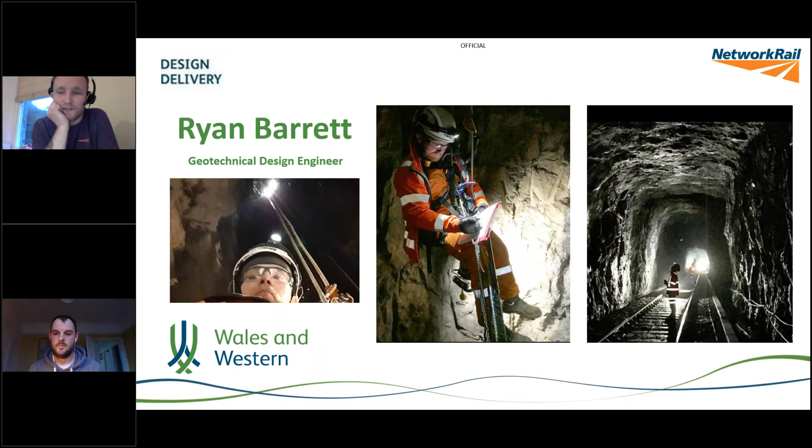I also work on some of the resilience projects with Alex and his team, developing sites like the Conwy Valley, coming up with new solutions to old problems that make the assets more resilient to existing and future weather events. So yeah, next slide, Al.

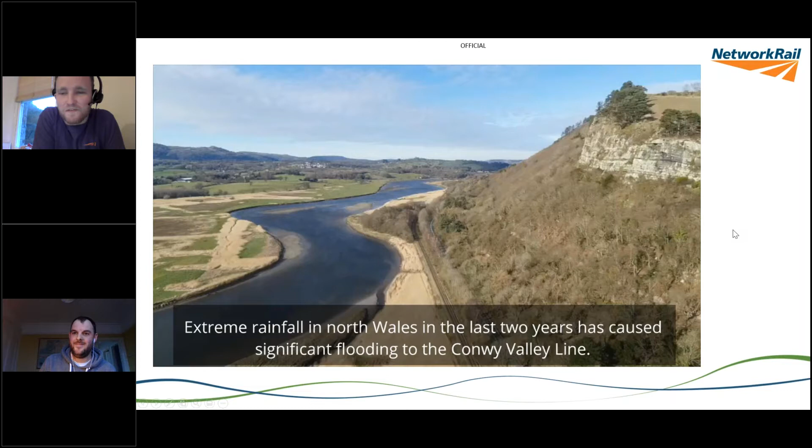So here's a bit of a promo video that was released on Network Rail media platforms to introduce the scheme to you. It was actually narrated by myself, which only took me about an hour and 23 takes to actually record the final voiceover. So I hope you enjoy. And then I'll pass you over to Alex after the video to talk through a bit more detail of the Conwy Valley.

So okay, let's hope this works. Thumbs up if you can hear it, Ryan.

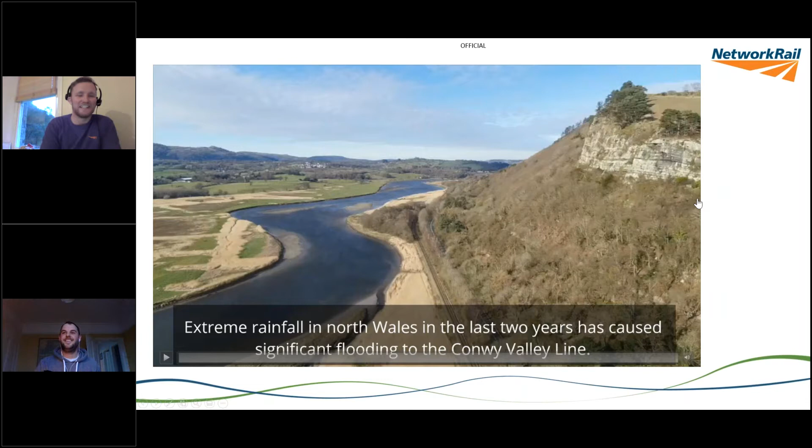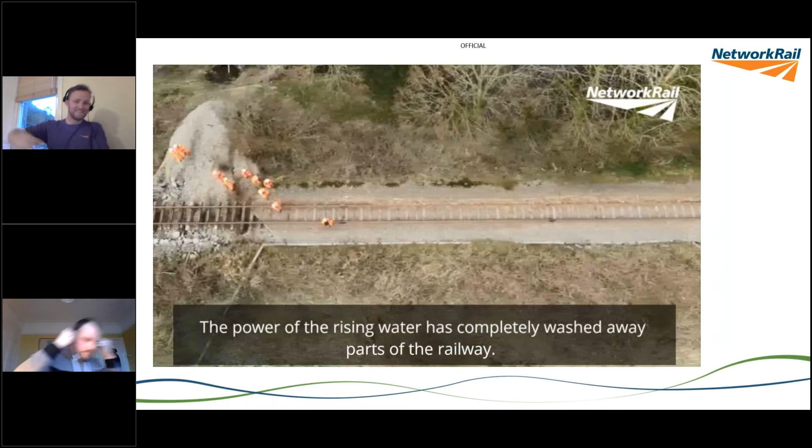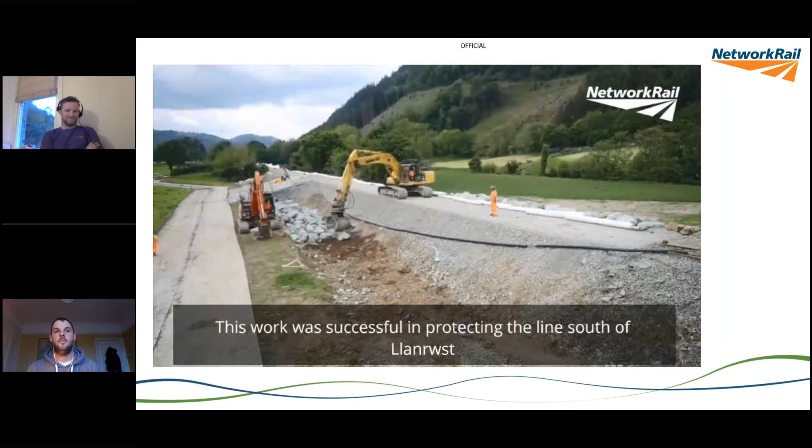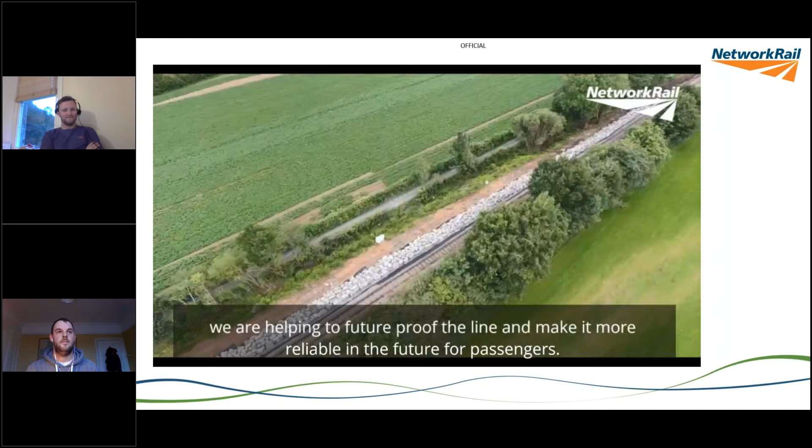Extreme rainfall in North Wales in the last 2 years has caused significant flooding to the Conwy Valley line. The power of the rising water has completely washed away parts of the railway. This has meant long closures whilst we have repaired the damaged sections. We are now installing rock armour between Tal-y-Cafn and Llanrwst to add additional resilience to the line. You can see around 20,000 tonnes of rock are being installed to just over a mile of embankment. We're replicating the work we did in 2019. This was successful in protecting the line south of Llanrwst from more significant damage during this year's storms. There's never a good time to close a railway, but by making it more resilient, we are helping to future-proof the line and make it more reliable for passengers. The Conwy Valley Line is a social and economic lifeline for the local communities it serves. And we'd like to thank you for bearing with us whilst we carry out this essential work.

There we go. Proud dad moment every time I watch that video. Not just of Ryan, but of the whole scheme. It's something I'm extremely proud of indeed, and I'll say that loads of times, so sorry in advance.

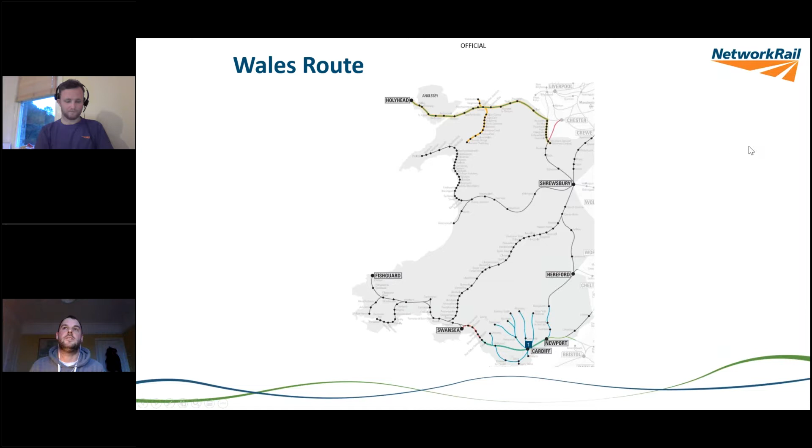So the Conwy Valley line. We have a railway that runs between Llandudno and Blaenau Ffestiniog, intersecting the North Wales Coast Railway at Llandudno Junction. ELR is LJT1, and it's 27 miles in length. There are 12 stations, some of which have the lowest footfall in Wales route, but we won't dwell on that.

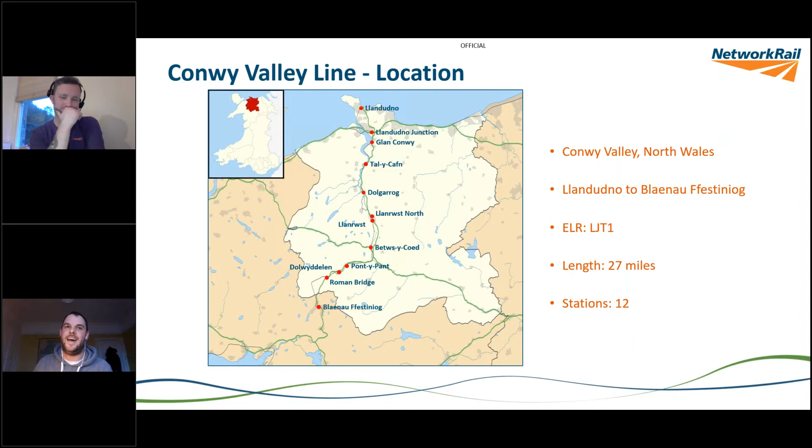So, mechanisms of failure. One of the failure mechanisms is overtopping. During an overtopping event, the water rises on one side of the embankment at a greater rate than the other, and ultimately the water overtops the railway. The issue isn't the overtopping itself, it's the cascade of the water to meet the standing water on the other side - the velocity of the water as it crests over the top of the railway. This happens from the highest point, which is obviously the rail.

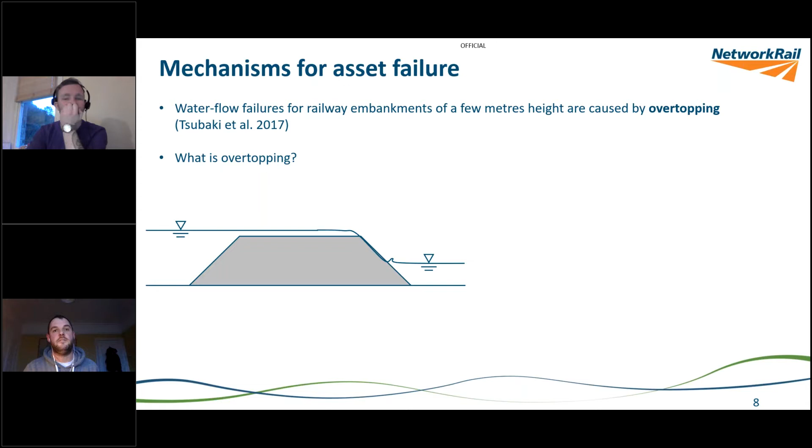The Conwy Valley is mostly jointed track, before anybody says what about the ballast shoulder. As the water cascades over the rail, it starts picking up speed, increasing in velocity, and begins very quickly to mobilize the ballast and take it away.

This is a photograph taken off the road bridge in Llanrwst, looking to the south, and you can see after the period of track, there's some white water there. If anybody joined us for our presentation in 2019, that's where we ended up installing 6 1.2 metre culverts to help take the flow and the pressure off the embankment.

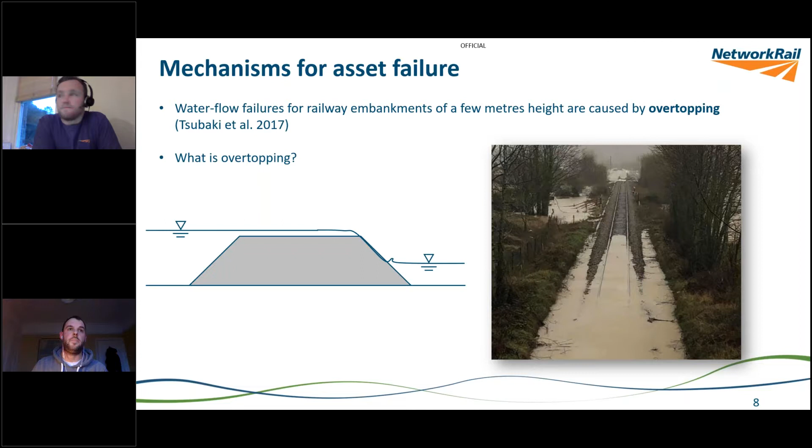That's what happened after that white water receded - we were left with a very big hole under the track. I'm really pleased to say that the works we undertook in 2019 held absolutely strong, and we had no impact whatsoever in 2020 through that section. I think I quote the track section manager: 'There's not a lump of ballast out of place, Al.' That's what he said to me, and he was as surprised as we all were. So it really proved the concept of the design that we installed in 2019.

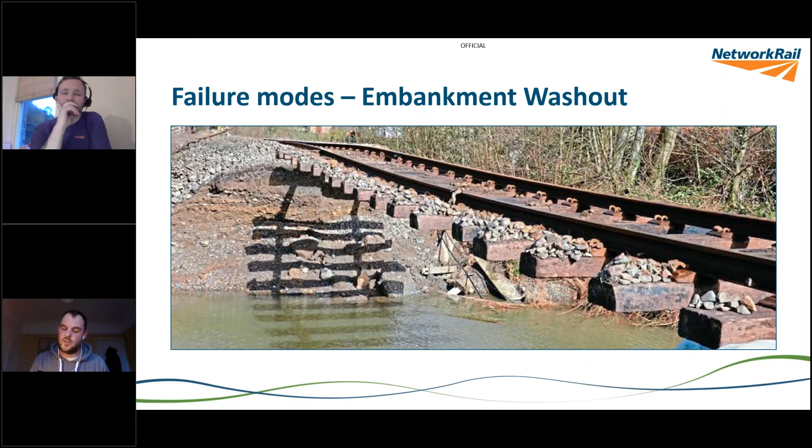So the bit that we're concentrating on from last year, 2020, was the section that we unfortunately ran out of time to remediate fully in 2019, because of this small thing of the National Eisteddfod in Llanrwst, that I'm not sure why, but Transport for Wales were pretty keen to get the trains running for.

So I'm just going to run through a few slides here which show the failure scenario at the 2020 site. Just to talk you through the drawing, because it's the same drawing for each.

You can see the railway line running towards the right-hand side of the valley floor there. The River Conwy is quite obvious because it's picked out in blue. What appears here to be a wall, just on the inside of the River Conwy, is Tan Lan embankment - a flood bund built in Victorian times to protect the farmland sandwiched between the railway and the flood embankment, to enable that to be made use of. You can see the one thing Tan Lan embankment does very well is it narrows down the floodplain to basically only the river width, which obviously causes problems when we are experiencing extreme rainfall.

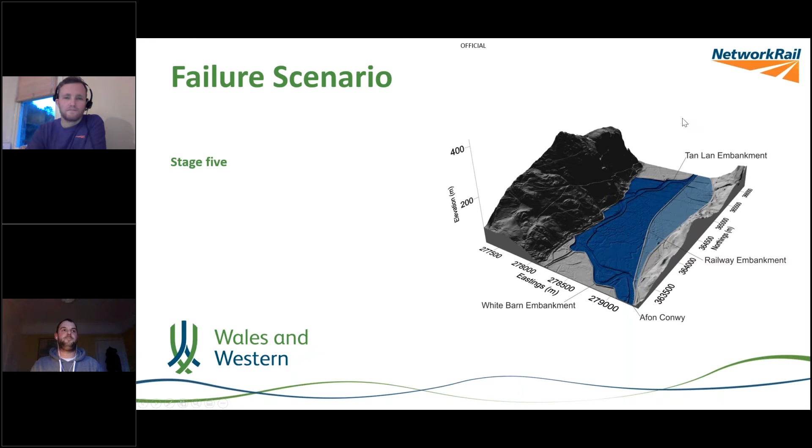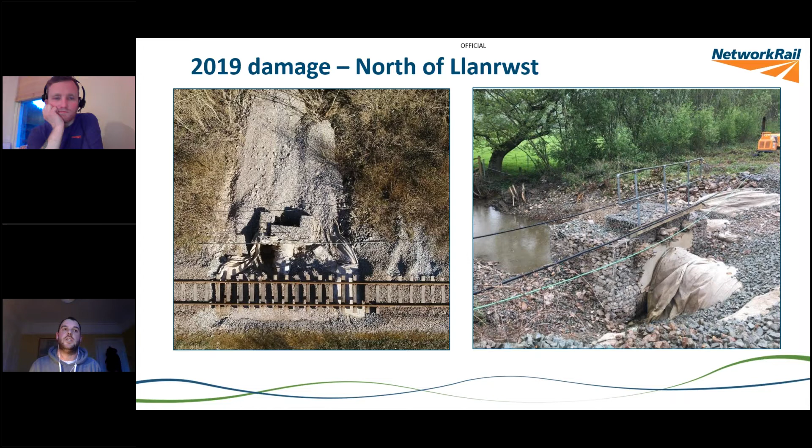So just to show you some of the work we did in 2019 and some of the damage, this was the scene replicated through this section in 2019, where we had lots of issues, particularly around the culverts. The reason for these issues is the drop off into the culvert approaches - through this section the embankment is relatively shallow with a shallow slope gradient. So the worst hit areas were absolutely around the culverts, where that water was raging over, and as soon as it gets a little bit of a bite, that's it - it takes the ballast away.

So what did we do? We didn't unfortunately have time in 2019 to rock armour this section, but we did do a pretty good job of the culverts - nice big head walls to retain the railway. In some cases, like this one we called Stonehenge - no prizes for guessing why - we actually rebuilt the whole head wall and the approaches to the culverts.

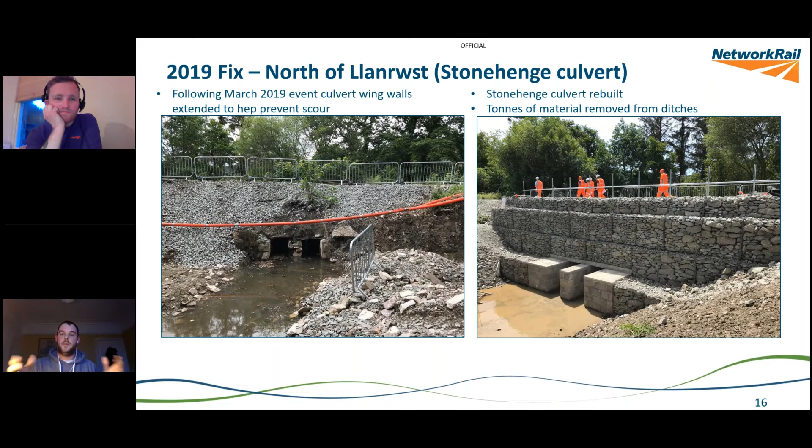So this is another before and after just down the road, so you can see the issue around the culvert head wall. It was much too small and didn't retain enough of the embankment, meaning the track got affected. So we extended that at the same time.

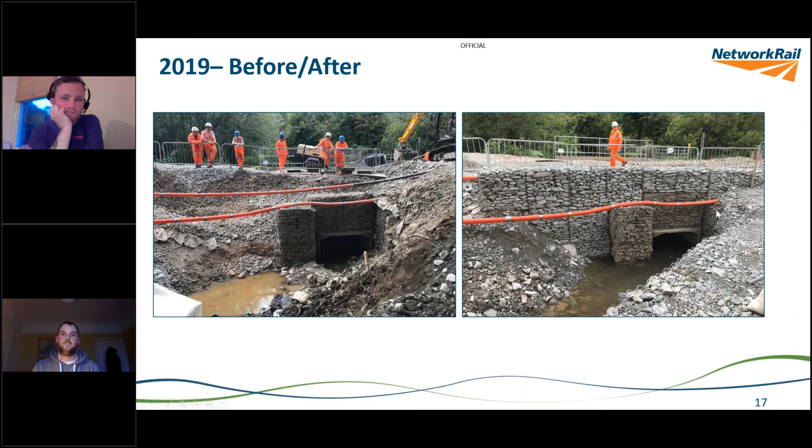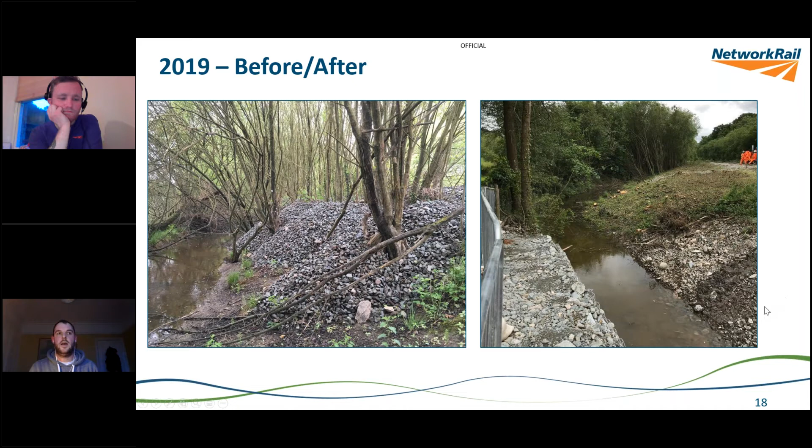Also, there was an awful lot of material washed out, not just from the 2019 event, but from previous events, the last of which was in 2015. So you can see there's a bit of an impact when you think about climate change - 2015, 2019, 2020, this failed 4 times. So it's getting more and more frequent, which sort of justifies the reason for this resilience activity.

So in 2019, we were very aware that we were leaving a risk on the Tanlan section, 1,800 yards worth of risk.

So we very quickly took the lessons learned from the summer 2019 works to the south of Llanrwst, and the design delivery team applied the original design to the typical sections for the Tanlan area. We were hoping to get in and make a start in October 2019, when there was a blockade on for Ryan's work, funny enough, in Llanrwst in the Og Tunnel. But unfortunately, we just didn't have enough time to get everything sorted, and in hindsight, 3 weeks wouldn't have hardly touched the surface of it.

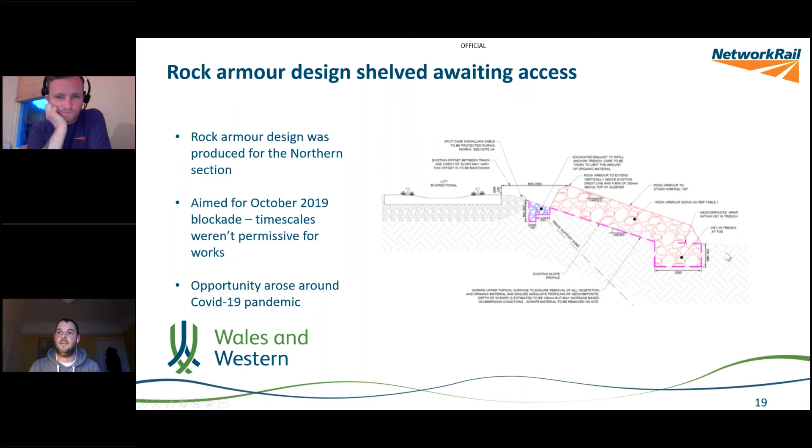But then an opportunity arose out of the COVID-19 pandemic - probably the only good thing to happen because of it. The Conwy Valley, as a very community social tourism railway, had a dramatic drop in footfall, to the extent where Transport for Wales decided not to continue running services following the remediation work of spring 2020. This gave us a window of opportunity through the summer, the best time, although you'd think you wouldn't get flooding in the summer - but we'll touch on that in a moment. We took the opportunity to get some money and have a go at it, which was absolutely fantastic.

So this is what we were faced with in spring 2020 - exactly the same places, pretty much to the sleeper, as 2019. All of that brand new ballast in the ditches and in the culvert approaches, and it just felt like we didn't quite get it right. We really should have pushed to get some more done.

So, is £1 million worth making sure there were trains to the National Eisteddfod? I'm not sure, because that's basically what it costs to reinstate the track for a second time in less than 12 months. I'm sure we've all got ideas on that. It'd be really interesting to find out from somebody on the cultural side of Welsh Gov what price they put on the National Eisteddfod, but it was £1 million anyway.

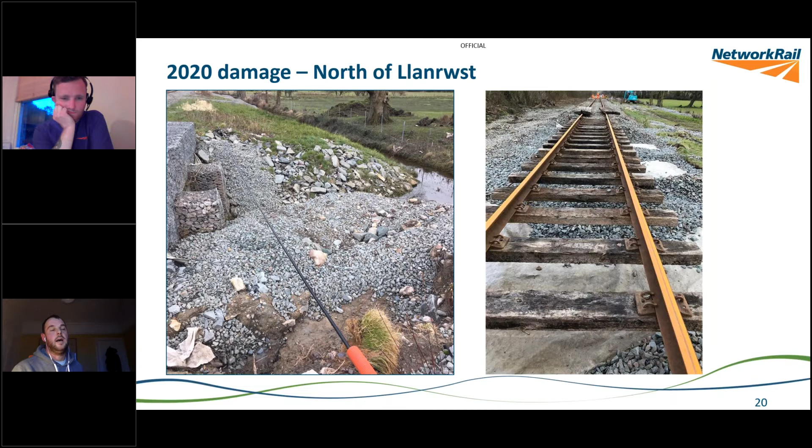Our works delivery team set about reinstating the ballast towards the end of February 2020, and then the conversations began to happen, probably at the end of June, with Transport for Wales and our delivery colleagues about providing some resilience through this section. I think that takes us on to Ryan.

It does, excellent. Cheers, Al.

So yeah, as we discussed earlier, this is just a little schematic of the site. You can see all the track there - we've got about 1,800 meters of track, 9 culverts, 3 level crossings, various bits of railway furniture. There's ditches leading along the railway, underneath the railway, through the culverts, lots of vegetation, and these are all things we contended with in the design, and obviously all of the damages that we reinstated during those events.

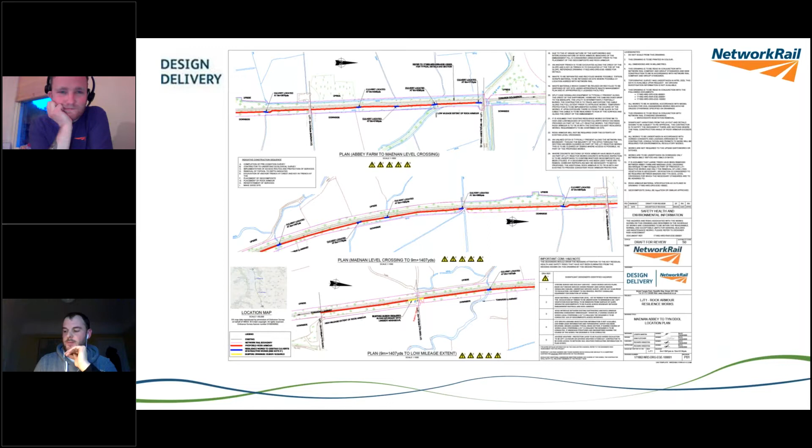Next slide, Al. I do my Chris Whitty now - Chris Whitty, next slide, please.

In terms of the actual rock armour design, the design is pretty flexible, and most of the embankment sections along the LJT1 didn't need much enabling works in order to install a rock armour configuration. We're lucky along this section that our Network Rail boundary is a fair distance from the running rail, and we have plenty of land for the design of the rock armour - on some of the other sites we're working on at the moment, or even some discrete sections of these sites, this isn't the case.

As you can see from the design section, you start off with a key-in trench at the base of the configuration, with geocomposite laid up the embankment into an anchor trench, which is below the base of sleeper level. The rock armour is then sequentially placed up the embankment, interlocking blocks as you go from the bottom to the top.

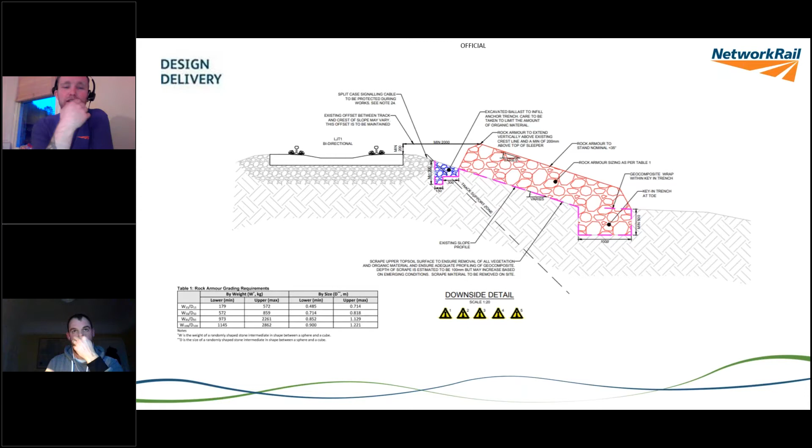What is not shown in the sketch is the voids between the rock armour in red and the track. We decided to fill this in with riprap, and you'll see in the pictures further into the presentation - this is one of the key elements that helps protect it when the water overtops the railway and flows over and through the rock armour. It just helps keep everything in place.

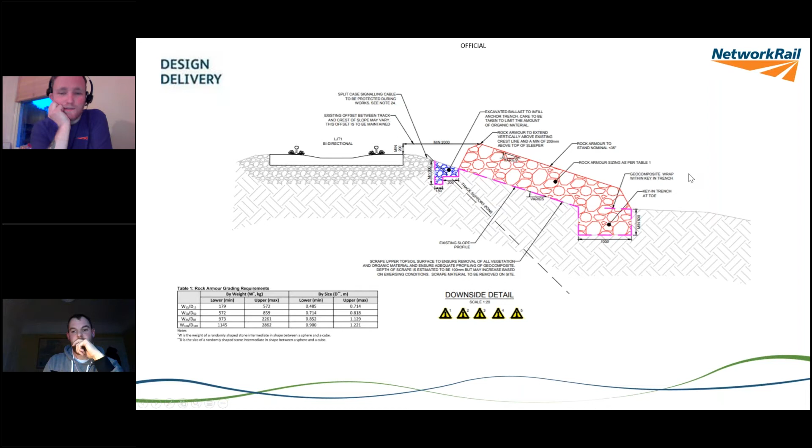From the construction, there's about 3,500 tons of material removed from the key-in trenches and the culvert approaches. As mentioned earlier, about 1,800 meters of rock armour was required throughout the length of the site, which was about 20,000 tons overall that we ended up installing. You can see from some of the pictures there of the construction process, with the machines on both the track and off track, placing the rock into the prepared embankment.

There were one or two engineering trains used to remove the material excavated from the ditches. Some of the material we used on the embankment where we had to decrease the gradient in order to place the rock armour.

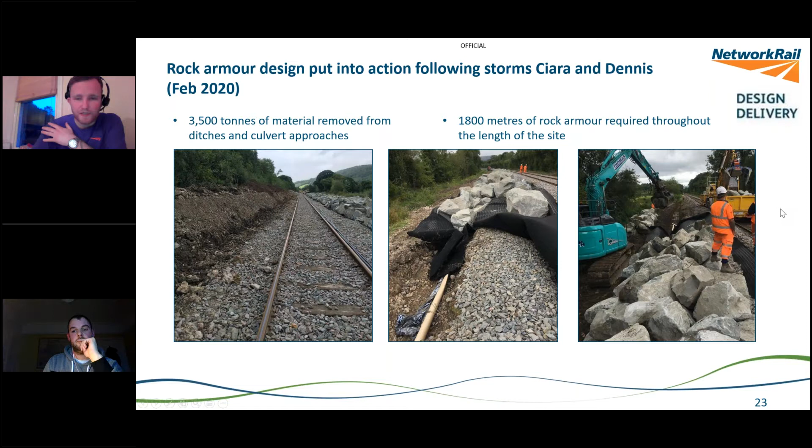You can see some of our Network Rail guys on site there. As Alex mentioned earlier, one of the main problems throughout the site was the culvert sections, where all the water comes through with immense power as water levels change.

These were some of the most damaged sections in previous events, as Alex showed in some of his pictures. We knew we needed to make these a lot more resilient than just building back again and again and again.

I was sat in a presentation with a geotechnical supplier, and they showed rock armour wrapped in mesh that they'd successfully used somewhere, I think the Netherlands, for sea defences. They said it was very successful, giving that added bit of security with the rock armour as well. A light bulb moment went off in my head.

This was around February time, when we started having discussions about going back and doing the rock armour around the LJT1 and discussing the culverts. We decided to put rock armour around the flanks of the culverts, meshed and bolted into place, to give extra security against the raging power of water flowing through those culverts.

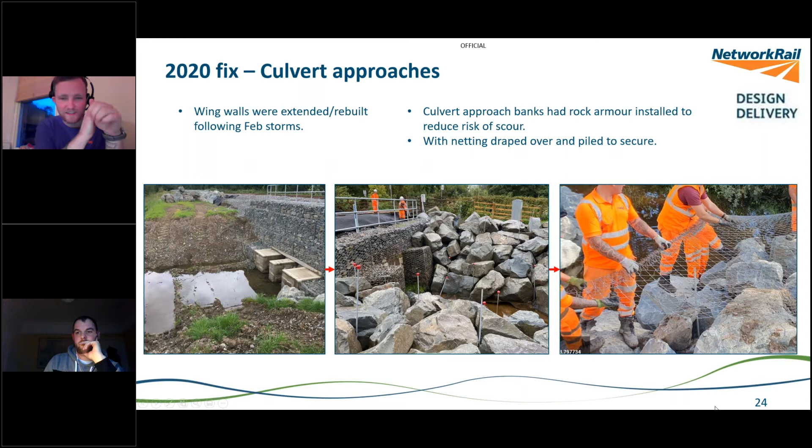The good thing about the site is that we had plenty of room for machines, and the site was quite extensive. Even though it was a single line track, you could have multiple machines working, placing the rock armour all along the sections, and it was quite successful in how quickly we managed to install it.

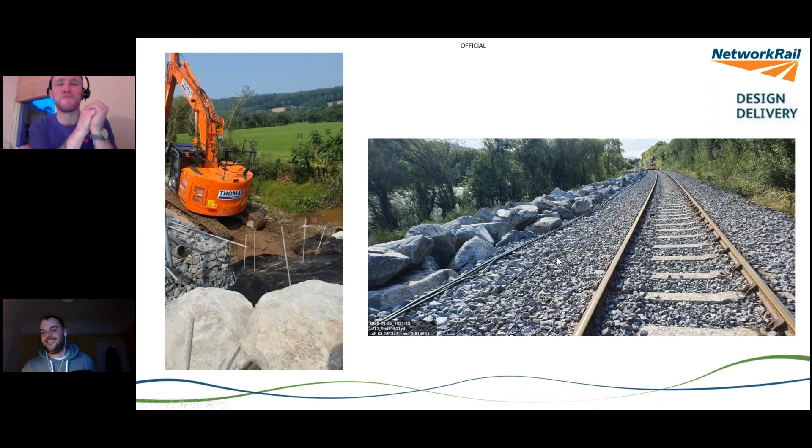It was just saying how lovely that rock was being placed by the machine around the culvert there with the bars pre-installed. I could just hear a Merthyr accent in the background.

That is probably one of my favorite pictures of the entire presentation, because that is actually after a storm event. As you can see, what did they say, Al? Not a piece of rock out of place there.

So you can see what I mentioned earlier. You've got the rock armour, and between the rock armour and the ballast shoulder we filled that void with riprap. That helped the interlocking process, and with the water coming over the railway, the ballast really hasn't got anywhere to move, and the whole embankment stabilised there.

Next slide, Al. It's worth dwelling on that point for a while, because as you saw from the original design, when we first installed the rock armour at the set distance away from the track required in the Network Rail standards, it became obvious that in some places there was still quite a big drop, up to a metre I'd say, from the top of the rail down to where the rock armour interfaced with the embankment.

This was the beauty of the team we had on the Conwy project. We had a very tight-knit team, including guys from my team as the client sponsor, Ryan's team from the design, the works delivery team from Shrewsbury, and also our project engineer Tim Howells, who works in the other side of the capital delivery organisation.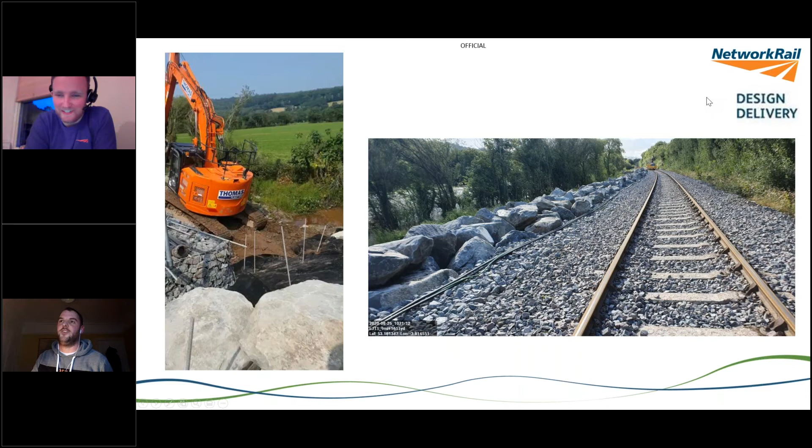But also a very proud moment, like you said earlier. It's nice to see it, especially when you've been there and seen the water around. You just think, yeah, it's going to work. Next slide, please.

And I think it's not the worst thing to look at, a strip of rock armour along the embankment. In fact I probably think it looks a bit better than it did before. It's not the worst looking engineering solution, is it? But we're not at all biased, Ryan. No, not at all. Absolutely not.

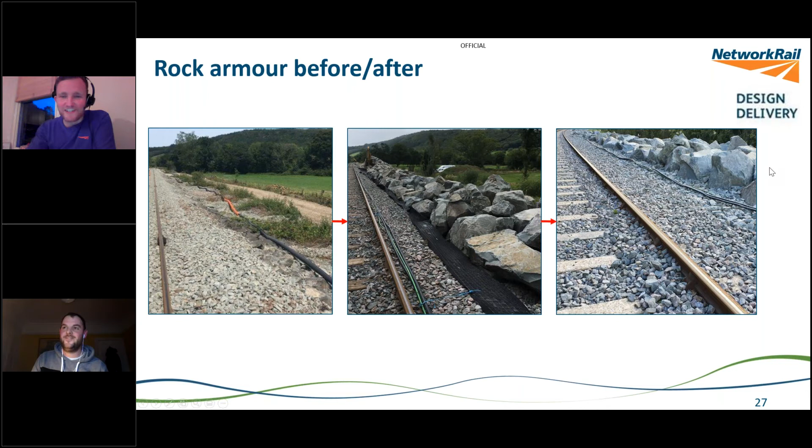I think we actually received some recognition from some of the landowners saying what a good job we did, rather than the usual complaints we receive on the railway. And the whole team was all Network Rail. That was one of the biggest achievements in my eyes, that it was 100% Network Rail designed and delivered project, building up relationships within Network Rail who we wouldn't necessarily have worked as closely with, but by building our relationship we've managed to achieve a lot more from the project than we would have otherwise.

Absolutely, Ryan. I think just to add to that, the team that delivered this, the guys on the ground, on the machines, they had never delivered a rock armour solution before. They had never put a ground anchor in before. They'd never used mesh before. This was a massive learning curve for our guys, but ultimately it provided a COVID compliant work stream to keep those people working, rather than sitting in their own cars, because they're not even allowed to sit in vans at the moment, sitting in their own vehicles waiting for the next job. So it kept everybody working throughout the summer last year, through what we all thought at the time was the worst part of the pandemic, but hindsight is a wonderful thing.

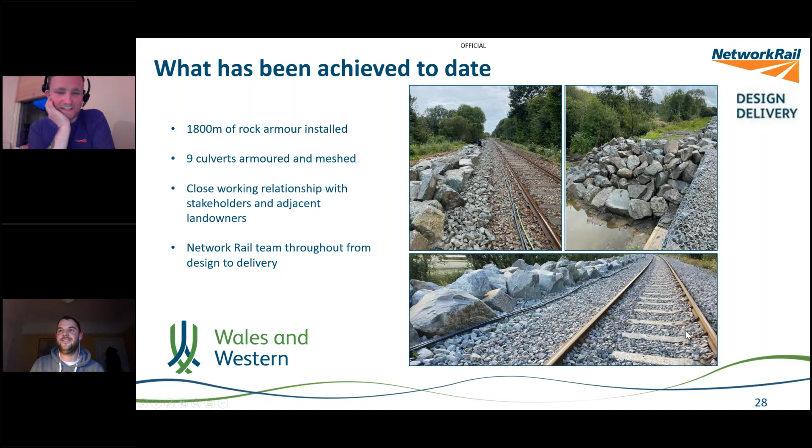I was in the right place at the right time, and was on the LJT1 at the time doing some rock cutting inspections further down, and I got a call from some of the works delivery gang who were on site saying, you need to come down to the rock armour. And I said, well, I can't come today, I was there yesterday, I need to concentrate on this site today. And they're like, nope, you need to come, there's water overtopping. And I was like, I'll be there in 5 minutes.

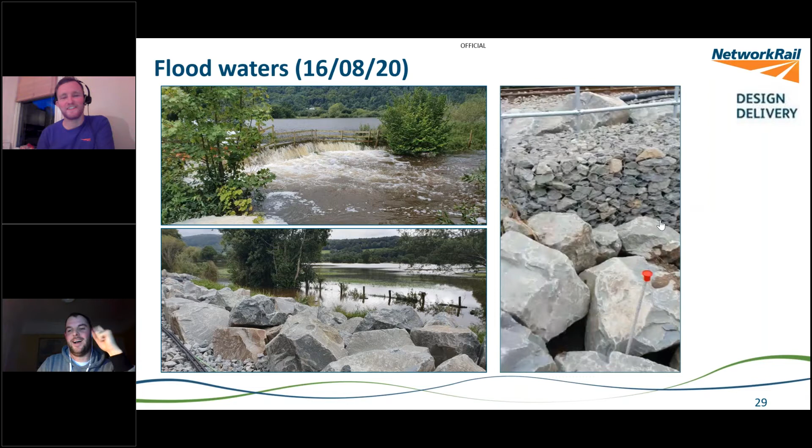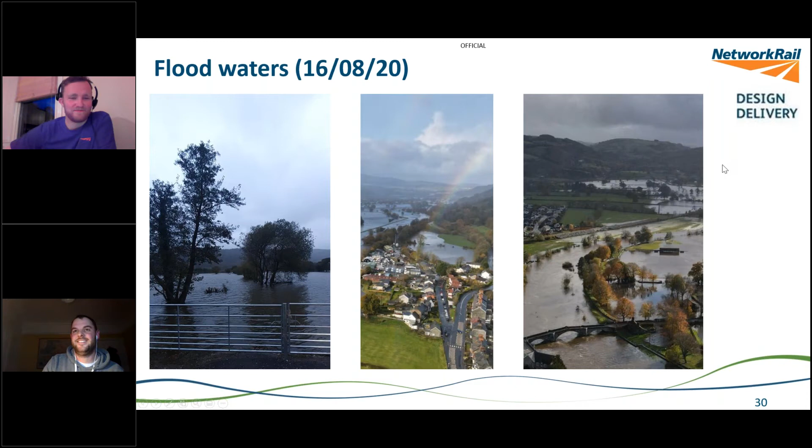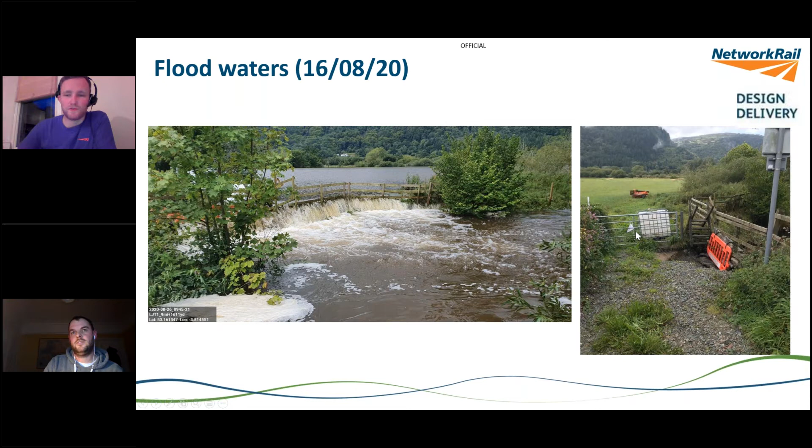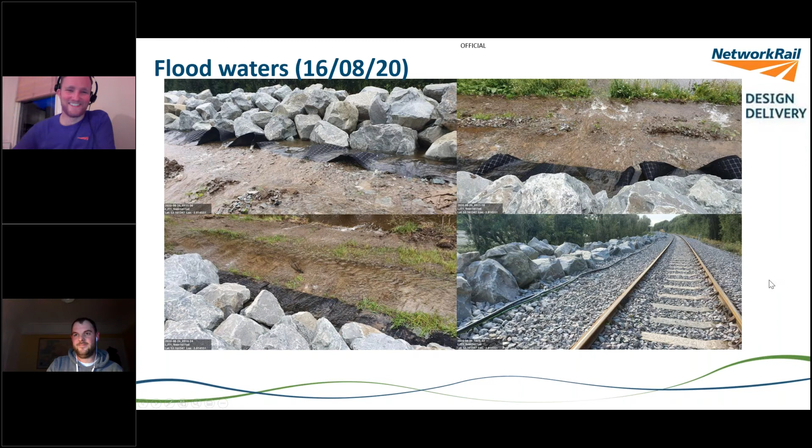Back up to you, Al. So yeah, we're nearly at the end, you'll be pleased to hear.

We handed back the railway on the 14th of September, which was a challenge. I didn't think handing the railway back would be difficult, but seeing as the railway shut halfway through February, that is 7 months, and I certainly didn't appreciate that drivers' competencies on route knowledge only last 6 months.

So we did not have any drivers route knowledge refreshed to open the railway on the 14th. I was extremely pleased that Transport for Wales eventually managed to find a way of doing it. There was an instructor driving with about 2 other drivers or something like that, to be able to run a train on the 14th. But then it went back to buses for 2 weeks while they did all the route refreshing with no passengers.

Eventually we ended up going back to what we'd like to call full COVID service towards the end of September, before unfortunately going back to the new lockdown timetable, which replaces most trains on the Conwy Valley with buses. But there we go.

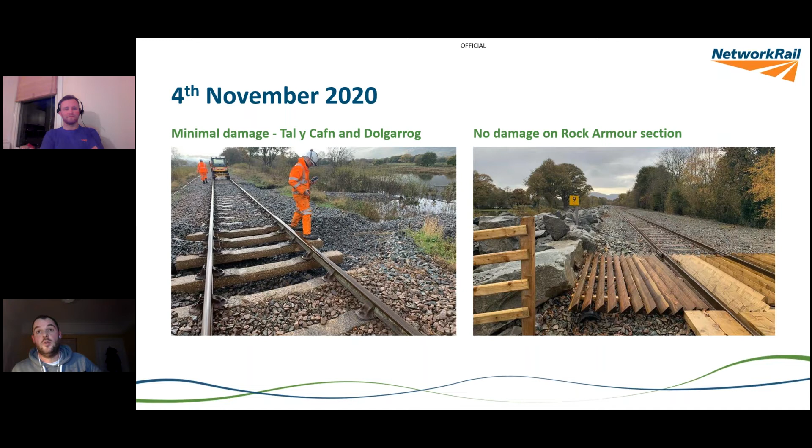By the time we managed to get road railers and ballast on site, it was Thursday, and then Transport for Wales ran services on the Monday morning, which was just fantastic. There's the guys from the local P-way team, and as far as I'm concerned, this is why it's a success. The local P-way team from Llandudno fixed this in 2 days. It didn't need works delivery, contractors, or millions of pounds spent on it. It needed £15,000 for the road railer and 35 tonnes of ballast, which is just fantastic.

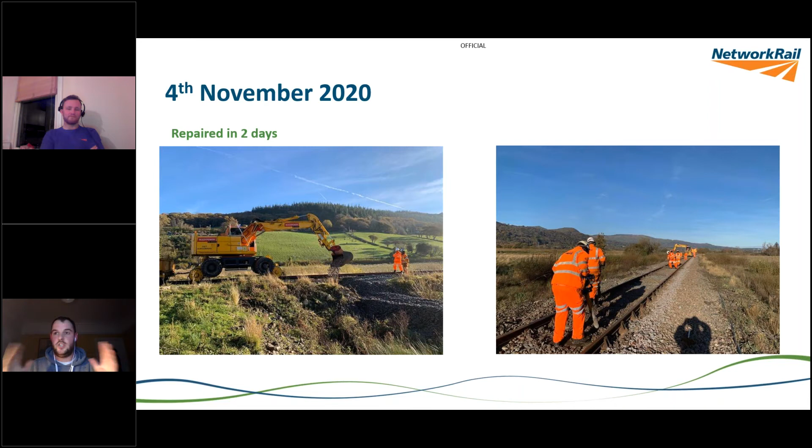We've gone from a 3-month closure and at least £1 million to reinstate the track in 2020, and probably more like £3 million just for the track reinstatement element of the 2019 project. So £4 million and getting on for 7 or 8 months' worth of closure to reinstate the railway, to £15,000 in 1 day, handled by the local P-way team without any need for outside influence, which is just absolutely fantastic news story.

So we are there now, as you can see today. Officially work started today, but as you'll see from the photograph in a few slides' time, they actually started last Thursday, because a lot of it was off-track work. Tyn Ddol level crossing posed us a bit of an engineering headache, as Ryan alluded to earlier. This is the point where we had no land, because back in the 60s, I think it was, British Rail sold a parcel of land with the crossing keeper's house to a private buyer, taking literally about 1.5 to 2 meters between the rail and the boundary fence.

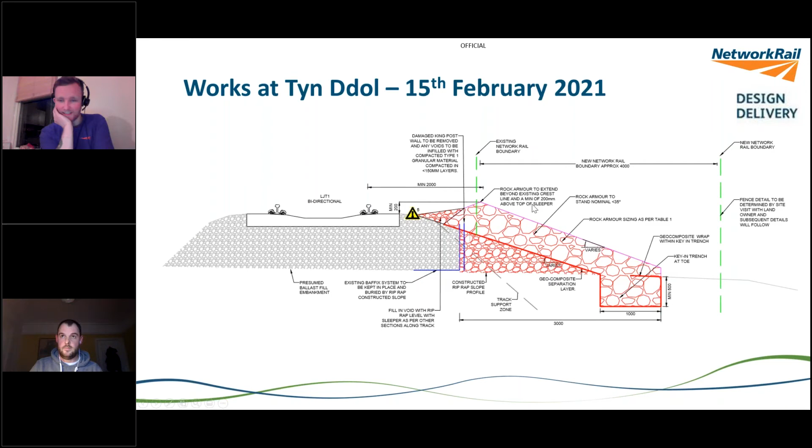So just over to Ryan for that bit now. Yeah, so Tyn Ddol really is like the missing piece of the jigsaw puzzle in the works we did in 2020, because we didn't have the land to put the rock armour in. But it's a 35-meter section, and we are now, after purchasing the 4-meter strip of land, putting the rock armour in, starting today, as Alex said.

There we are. Do you want to go through that, Ryan? No, it's fine, no, that's fine.

So hopefully within the week we'll have a fully complete 1,835-meter section of rock armour that's going to stand up to all the weather events we expect in the Conwy Valley. And like Alex said, we'll be looking at the other sections towards the north and hopefully making those a bit more resilient now based on what we know from the most recent failures.